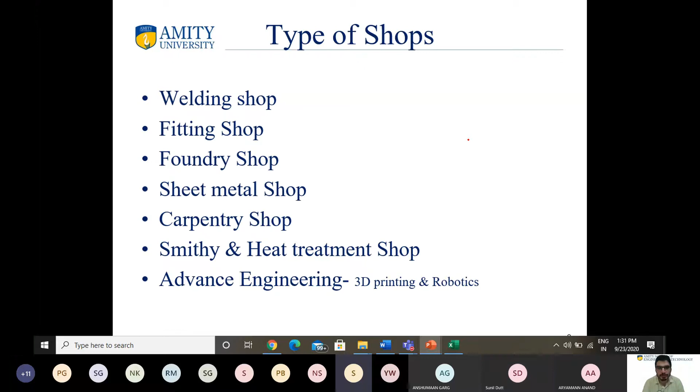Okay, today I am going to do - we have already completed our two experiments, welding shop and fitting shop. Today I am going to proceed towards the foundry shop, right? These are the list of experiments. I have already explained the first and second experiments, and this is our workshop lab. I have already explained where you have to do the work and which type of shop we are doing. Today our aim of the lab is to make a single piece and double piece pattern mold.

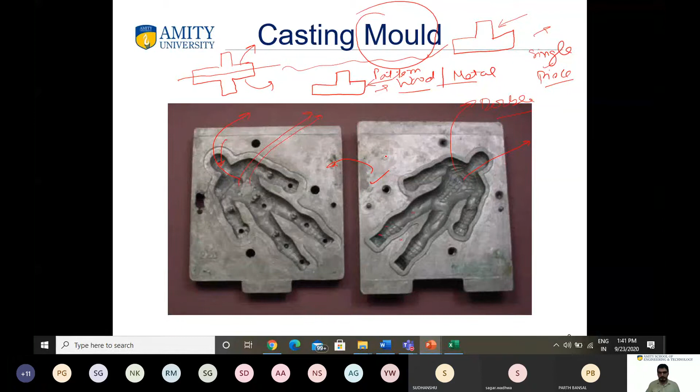It is the replica of an object. Yes, replica of the object to be cast with certain allowances.

Why is there a need of allowances, beta Lakshika? Can you tell me? Excuse me sir, may I? So you told us that is in molten form. Then? Just because of that? No beta, no, this is not that. Basically, you have not explained well.

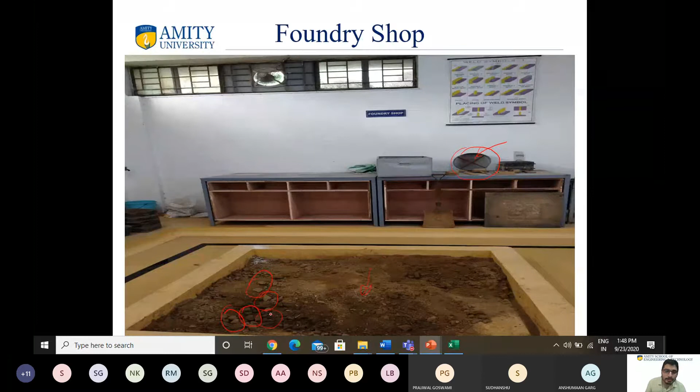When you are using the sand, these sand particles are in a closed, lumpy shape. For pressing it and making it fine, you use the mallet. Here you can see loads of closed structure of the sand. To convert it into the fine pattern, you use the mallet.

Students, are you able to understand or not? Yes, sir. Is it clear to all of you?

Now, these two rods are known as the sprue and riser. I will tell you the working of the sprue and riser when I show you the video. Then only you will be able to understand the exact meaning and use of the sprue and riser.

And these are the pins which we use to take out the pattern from the sand. These are the patterns. This is a single piece pattern. If I need to make this shape, then I can make it in a single box.

If I need this shape, then I need to make it in the double box. Double pattern means I need to divide the upper part and lower part. For making this shape, I need the double pattern, and for making this shape, I need a single piece pattern.

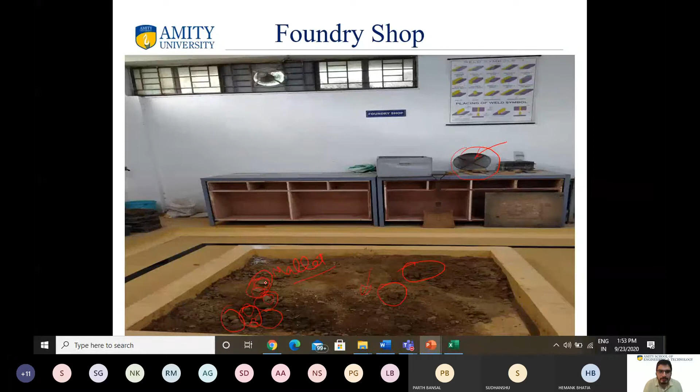Like sometime you have seen here, such types of blocks are there, right? Are you able to see, beta? So to convert this block into fine particles, you use the mallet. For packing the cope and drag with the sand, you use the rammer.

Okay, sir. Okay, beta? Excuse me, sir. Yes, beta. Sir, what are those tools at the last? Where, this one? Yes, sir. These are the pins. Okay, I will show you.

Sir, what is the use of trowels? Where are the trowels? This one. Yes, the trowel is basically used to make a shape in the mold.

If I need to make a particular corner type shape, you will not get the exact shape with the help of the pattern. Then you can use this trowel with the help of it. I will show you the working. Wait for some minutes.

Now, this one is known as the cope and drag, in which you will put your pattern and sand. These are two parts. The upper part is known as the cope, in which you can see the extra material is there. The lower portion is known as the drag. Remember these two words: cope and drag. Upper part is known as the cope, the lower portion is known as the drag.

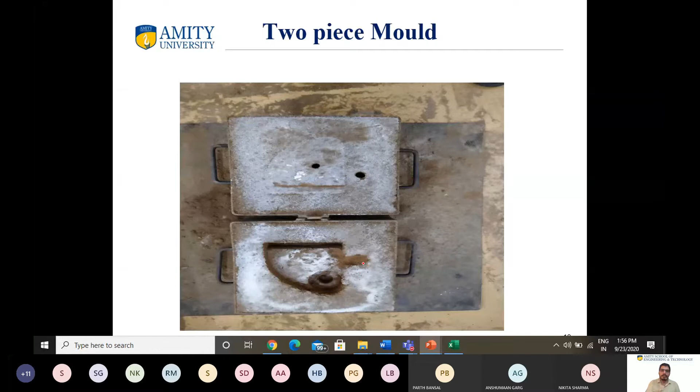These are the shapes which we can make, like I have shown you this part. This shape I am going to show you in the cope and drag. When I make it, such type of shape will come in the sand. I will show you the working, and I will show you the video in which you will be able to understand. I will come back again on the previous slides. Firstly, see the video.

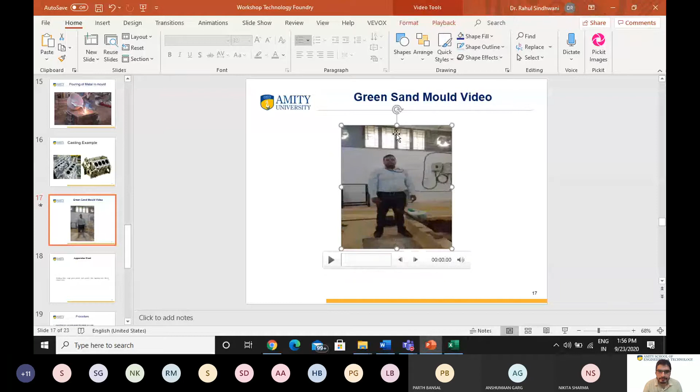Just a second. This is our lab only, our Amity University lab. These are the lab attendants. I think the video is not coming properly. Just one second.

I want to show you one more part, this one. This one is basically known as the shovel, which is not there in the tool. Are you able to see this shovel, beta? Yes, sir. This is known as the shovel. This shovel is used to mix the sand.

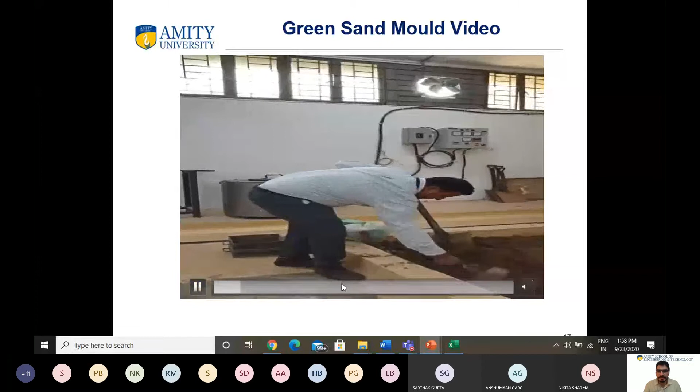Now who can tell me, what is this by which they are just pressing it? What is this? Mallet, this is known as mallet. And what is this which is in their hand? Shovel. This is the board right now, on which they will put the cope and drag.

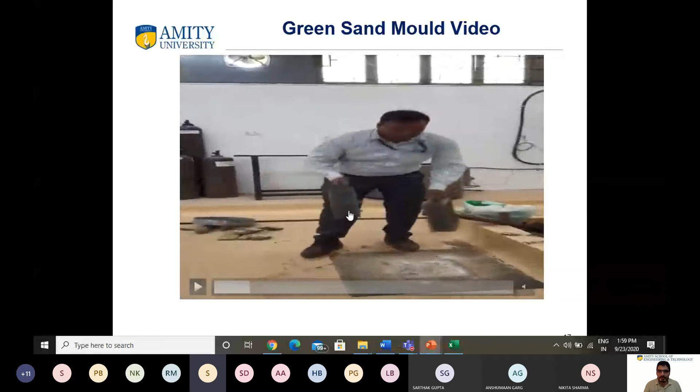Okay beta, who can tell me what is the name of this part? Cope or drag? Cope, this one. Cope, sir. And this one? Drag. Drag, sir. Good.

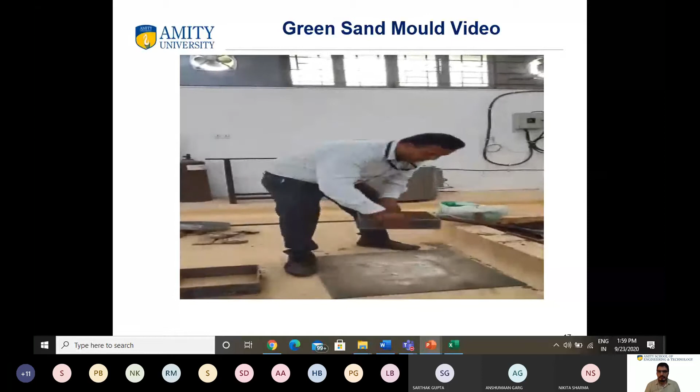Firstly, you have to put the drag on the board. They are going to make the double piece pattern. Okay, I have shown you this part, I think. Firstly, what you have to do is put this one part of the pattern on the drag.

This sand is a parting sand, not a green sand. This parting sand is used to separate your green sand from the pattern. When you will not use this parting sand, they will stick with each other. To remove the stickness from the green sand, we are using the parting sand. They are just throwing the parting sand.

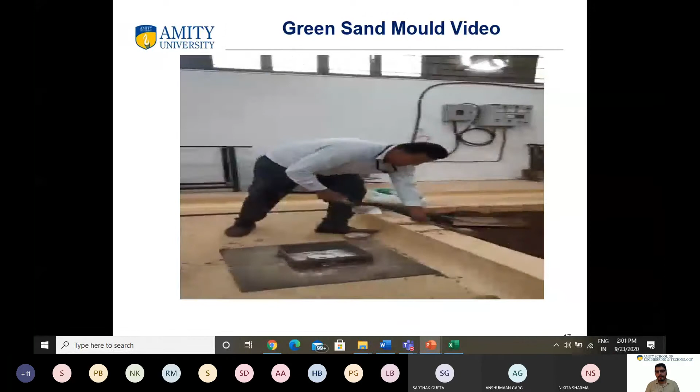Now you are able to see what is the use of these two. What are these? Rammers. Rammers. What is the use of rammer? It is used to press the sand in cope and drag, for pressing from the corner. So that's why there are two different types of rammers.

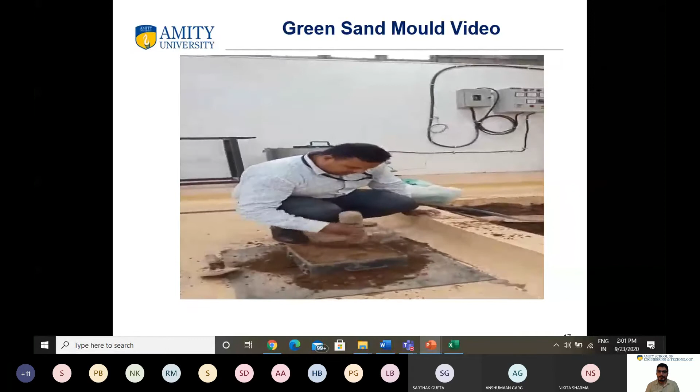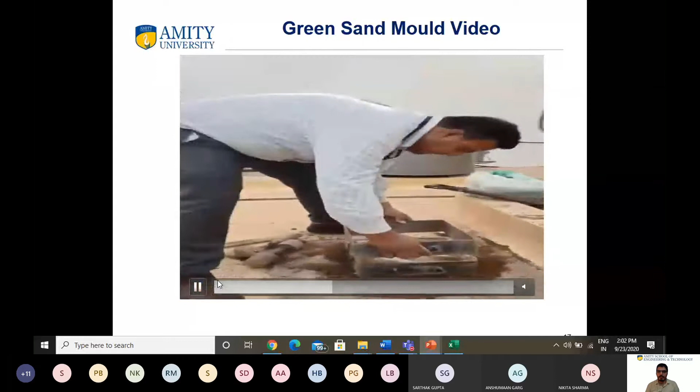Now you can see the use of your wooden rod. Now you can see here, your pattern is coming here. After that, what you will do? You will put this cope above the drag. Then after that, in the same way, you will put another part of your pattern. Then after that, you will put the parting sand so that it will not stick.

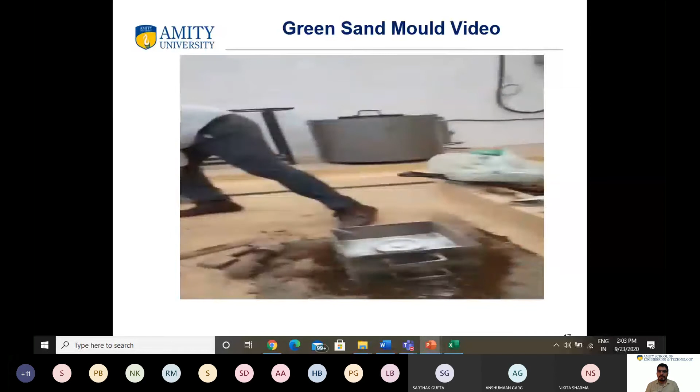Then after that, you are going to use these two rods. These are sprue and riser. What is the use of sprue and riser? Why is there a need to put this sprue and riser? Now listen carefully.

This one is known as the sprue and this one is known as the riser. The sprue is used for pouring. What will happen when you put this sprue and riser? Then two small holes will generate in the sand. What is the use of that?

Basically, with the help of this rod, this hole, this blank space, your molten material will insert from this rod. And the use of this rod is basically to check whether your material is filled in the mold or not.

And the second use of this rod is to escape out the hot gases. Because when you put the molten material in, it is in very hot condition, the hot gases will generate. These hot gases need to come out, so that's why we are putting this hole.

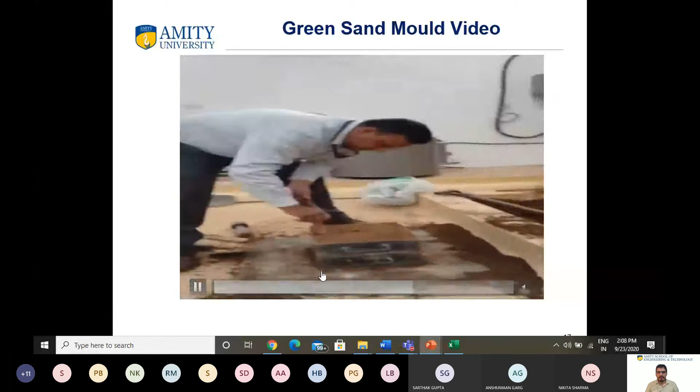Now after that, what you have to do is take out this sprue and riser from the sand. Now see, who has asked me, who is not able to understand the concept of sprue and riser? Can you give me your name beta? Sir, Nibir Maram Deka, 0348. 0348, Nibir. Yes sir. Now just see here.

You have taken out your sprue and riser. Have you seen? Yes sir. Now from here, this part is known as the sprue. Now what happened when you take it out, sprue and riser, then one hole will generate.

One hole will generate inside the sand. With the help of this hole, you will pour your molten material. This hole is known as the sprue hole, and this hole is known as the riser hole. With the help of this sprue hole, what you will do is pour your molten material. The use of this sprue hole is to put the molten material.

Nibir, is it clear, the use of sprue hole? Yes sir, I got it. Now, what is the use of this riser hole? This riser hole is to check whether your molten material is completely filled in the mold or not. And the second use of riser is to

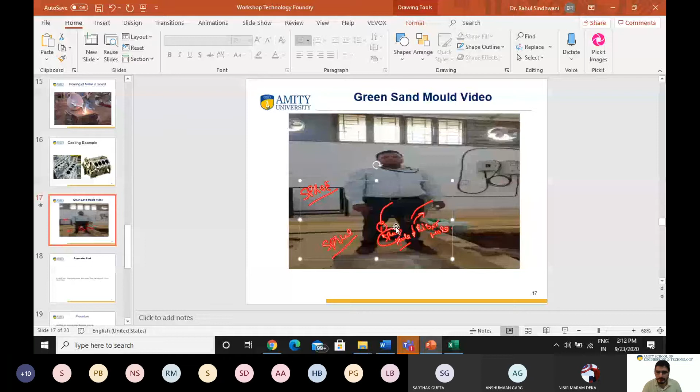Just give me a second, I will play the video again from where we left off. We have just let the gases escape from the sprue and riser. Then after that, what are they doing? Just see here - they are making the hole of the sprue hole much bigger so that your molten material will go in properly.

To insert the molten material properly, they have made a big hole. Now just see here what they are doing - they are separating out your cope and drag.

Now these are your patterns which you have inserted in the sand. Now there is a need to take out these patterns so that you are able to see the mold in which you will put the molten material. What they are doing is pressing the mold, pressing the pattern so that it will come out easily.

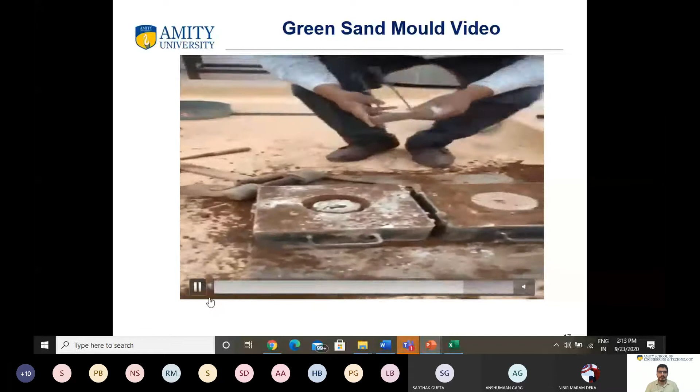Now this is the use of the pin. Are you able to see the pin? With the help of this pin, you can easily catch your pattern. Now you can see the shape - this shape is known as the mold, this blank shape is known as the mold. And this one which is in the hand, this is known as the pattern.

Now you will take out this pattern from here. Now you can see both the shapes. What is this? These are the molds.

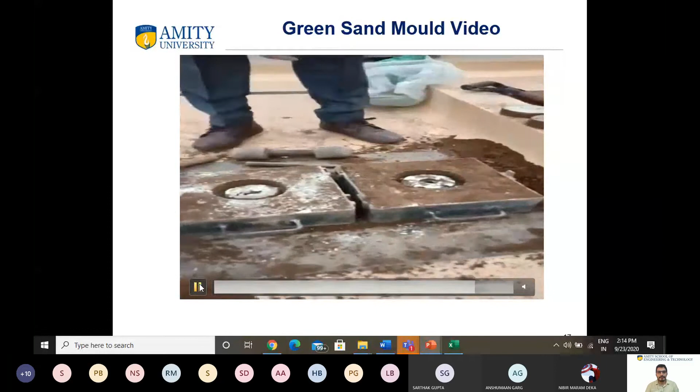Now what are they doing? They are making a path because your molten material comes from here. For the molten material, there is a need for it to go inside the mold, so they are making a path through which your molten material will go. The molten material will come here, and with the help of this path, it will enter the mold.

Now they have closed it again. Now what will happen - inside this mold, your molten material will go from here. Then they have made the path for it. From that path, your molten material will come into the mold, and the hot gases will come out from this riser hole.

Are you able to understand, students? Yes sir. Is it clear to all of you? Yes sir, yes sir.

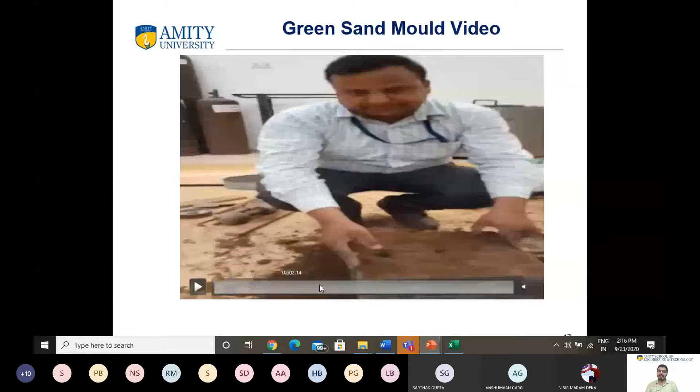That is all about your double piece pattern or single piece pattern. If a single piece pattern is there, then there is no need to put the second pattern. If a double piece is there, like this, we have used both cope and drag. Now just see again - if you have any doubt, then you can tell me.

Who can tell me what they are doing? Which sand is this? Parting sand. Yes, parting sand.

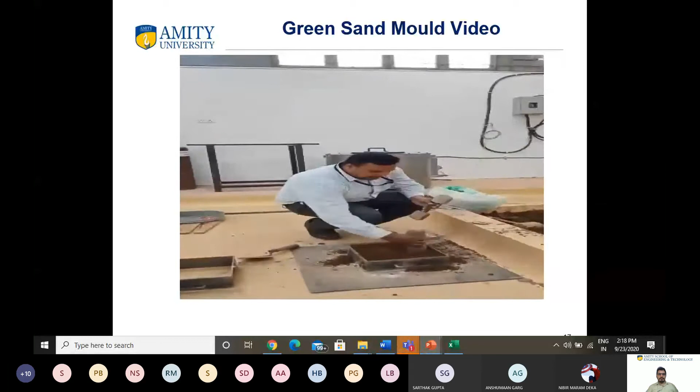Excuse me, sir. Yes, beta. Sir, give me your roll number. 349. Anshuman.

Sir, when we have created a small path so that the molten material could flow out in the end, does all of the molten material flow out, or is there any excess which flows out? From where? The path which we have made. Yes sir, in the last, when we make the path. Last, beta, with the help of that path only your molten material will come into the mold. You have put your molten material in the sprue hole.

Yes sir, then after that when your molten material comes in the sprue hole, there is a need for it to come into the mold. Yes sir, how will it come into the mold? They will make one path. Okay, with the help of that path only, your molten material will come into the mold. Okay sir.

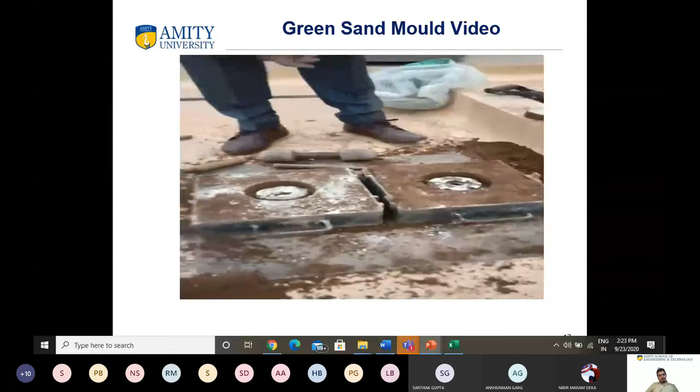Now from here beta, from the upper side you will put the molten material. From here you are making a path for your molten material basically. When from the upper side, from the sprue hole, your molten material is coming, it will come into this mold. Okay beta? Okay sir. Anshuman? Yes sir.

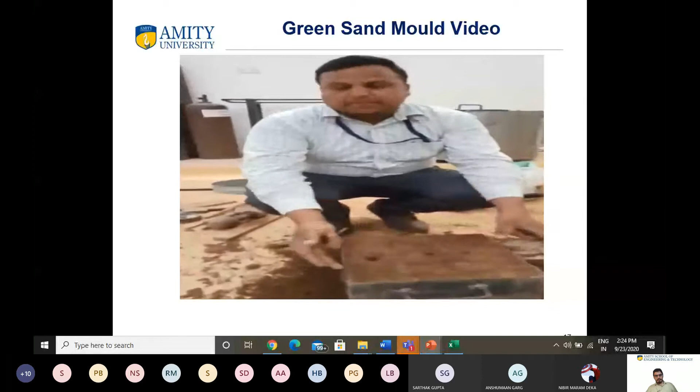Clear, beta? Any doubt to anyone? Now coming back to the tools, are you now able to understand the tools? Yes sir. Have you seen the use of every tool? Any doubt to anyone?

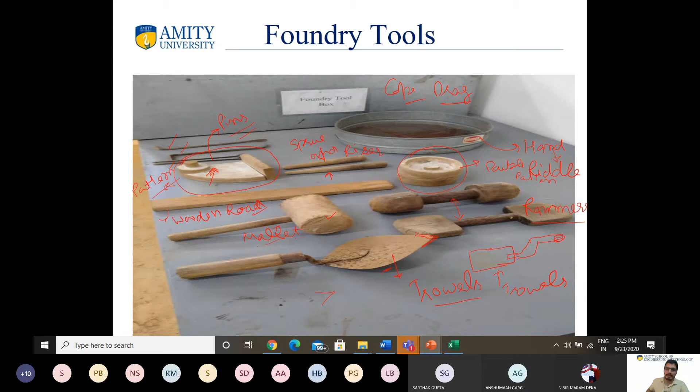Sir, where did we use that hand riddle? The riddle, actually they have already used it. They have not shown you. It is just used to sieve out the extra material or foreign material. They have already done it. Okay sir.

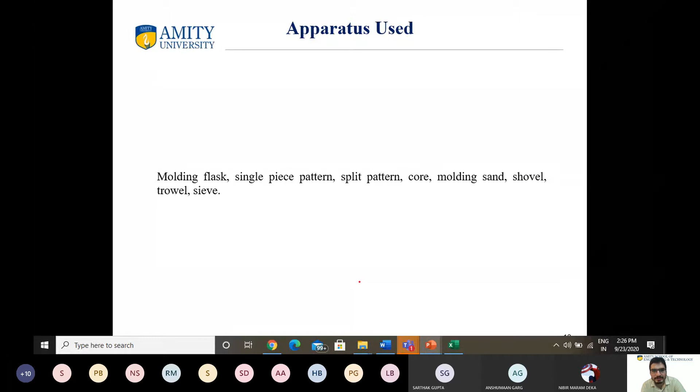Check to see if the metal molds are clean and free of any greasy substance. Mold handles should be used on the metal molds. They are threaded onto the screw located on the back side of each mold.

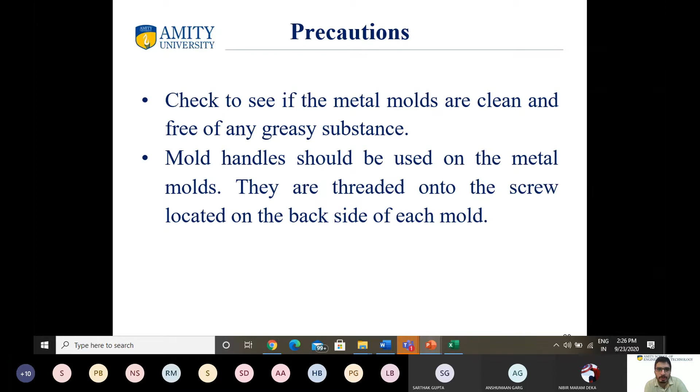What is the casting process? I have already explained to you. The gating system is the system through which your molten material will come from - tell me, from where will the molten material come? Sprue hole, and after that it will go to the mold. So the system between the sprue hole and the mold is known as the gating system. The path you give to the molten material to come into the mold is known as the gating system.

Different types of patterns: single piece pattern, double piece pattern, and sometimes you use the multi-piece pattern. If the shape is very difficult and you are not able to make it with the double piece pattern, you can use the multi-piece pattern. But in our experiment, it is only single piece and double piece pattern.

What are the benefits of sand casting? The benefit of sand casting is that the cost is very low and it is easy to make. Easy to make and low cost - these are the benefits of sand casting. Any doubt, beta?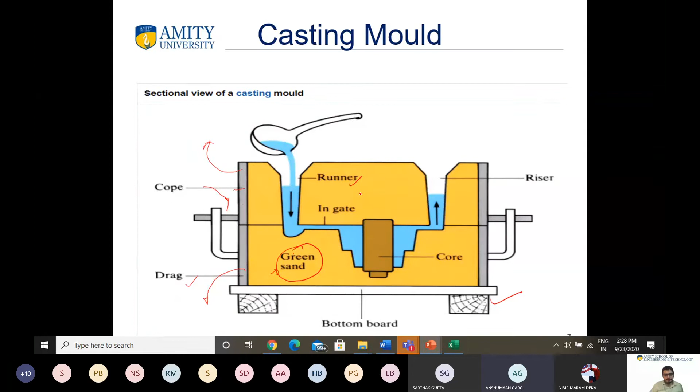One thing more - now I think you are able to understand this slide. Yes sir. That is all about today's experiment. Now I am going.

Yes beta. Sir, is there not any video of that pouring of molten material into the mold? No no, beta, that is not in our syllabus. Our experiment's aim is just to see - what is our experiment's aim? Okay, to just make it - to make green sand mold, we have to make a mold using single and double piece pattern.

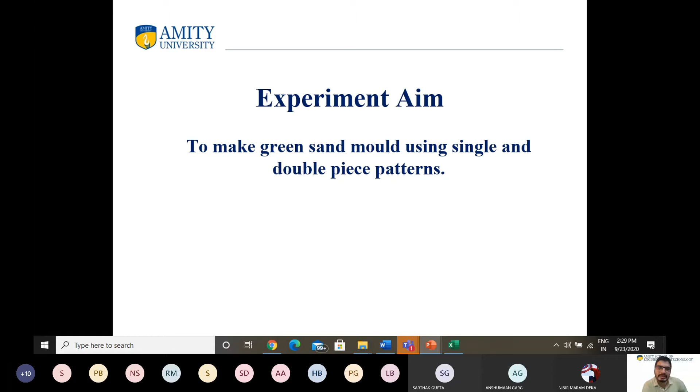Okay beta? Okay sir. That is the next part - with the help of that mold, you make the shape. Our today's experiment aim is to make green sand mold using single and double piece pattern. Any doubt to anyone? Students, any doubt?

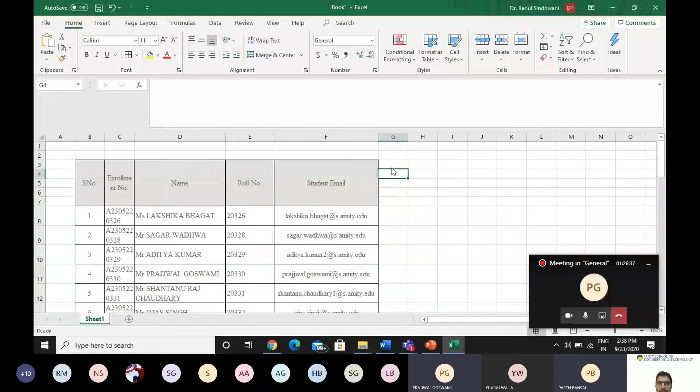Okay sir, I deleted it and I have put it in the welding section only now. That is good, that's good. Okay, now I am going to check your file.

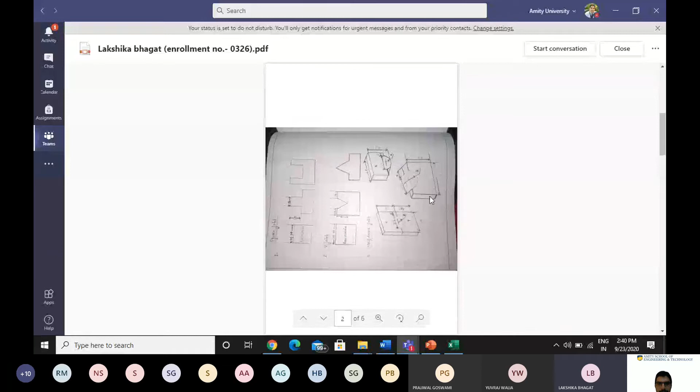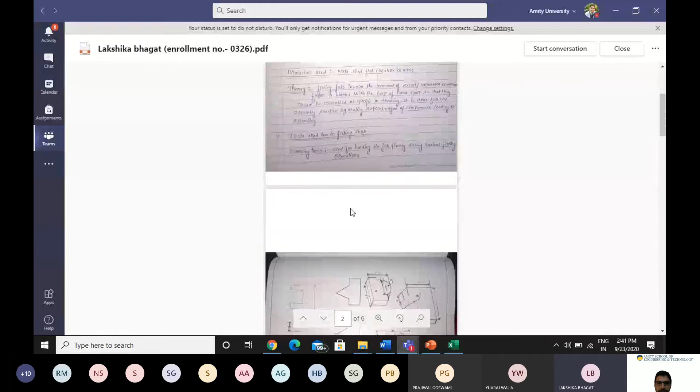Okay, can you tell me the complete process to make a V joint? Sir, for making a V joint, first of all the raw material is provided to us. Then we need to use the benchvise for making that V shape by putting it in the benchvise. And then we need to make one cut, then again we need to take it out.

Firstly, open your camera, Lakshika. Open your camera. Yes sir. Can you tell me any 5 tools which you can use during the fitting shop? Okay sir, chisels, divider, benchvise, marker, and dot punch. Okay, good.

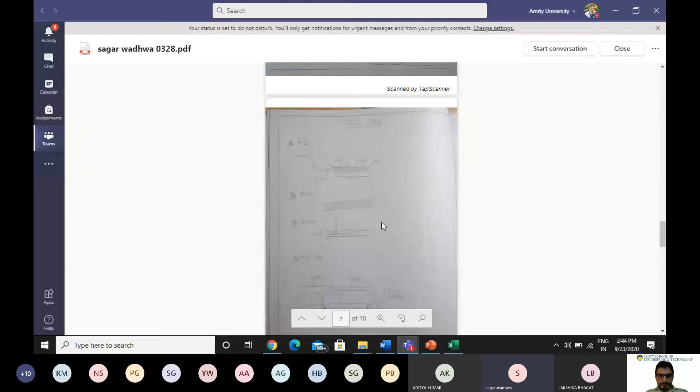What is the use of a hacksaw in this experiment? Sir, a hacksaw is used to cut the workpiece that is of metal, so that we can acquire the desired shape. Yes, good.

Can you tell me the process to make a V-joint? In a V-joint, first we take our workpiece and set it on the benchvise at such an angle that we can cut a V shape from it. But we also have to use a file because we cannot properly cut a V shape, so we use a file to remove the extra piece of metal from it. Good, beta. Thank you, sir.

Now Aditya, your file is not here. You have sent me on WhatsApp. I will check it later.

Prajwal Goswami. Yes sir, I've uploaded both of mine, the last one for reconsideration and this one for submission. Where is it, beta? Sir, if you go here. Yes, getting it. Firstly I am checking your fitting shop file, beta. Okay sir.

Sir, I couldn't put diagrams in that way because, I don't know, I think cam scan will glitch there.

What is the use of hammer in this experiment in the fitting shop, beta? Sir, hammer in this experiment, if there is some uneven surface, we can use it to even it out. Let me frame the sentence, sir.

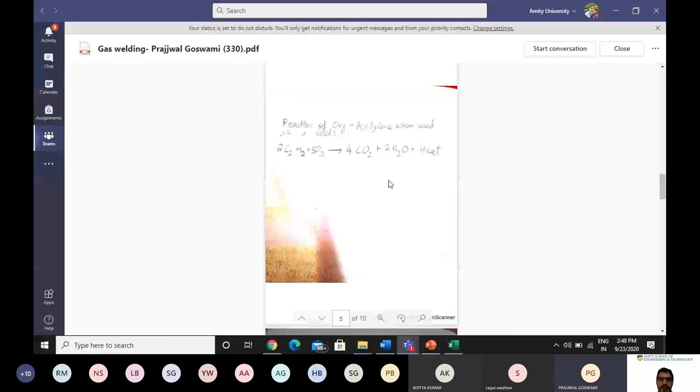Where is the water here? When you will just react these two gases, then the water is coming. Water you will collect in any? Where will the water go? Sir, I think due to the heat, the water should just evaporate.

Yes, sir, here are the diagrams you said to make. You have to write the caption also, whatever it is. What are these? These are cylinder, okay sir. You have to write what you are doing here, you have to write here figure one. I think, sir, the diagram I have written is for this one, gas welding, on the top.

Where is it? I'm not able to catch it. I think it didn't come in the photo, some part of the top is cut. Sir, this is the arc welding one, in this I wrote below. You have no eraser? Why have you not erased the extra part? Sir, sorry, I didn't notice that.

Yes, that is okay. I am increasing your marks from B plus to A, right? Thank you, sir.

The next student is Shantanu Raj Chaudhary. Are you there, Shantanu? Sir, I've shared it on your WhatsApp. Why on WhatsApp? Sir, I'm not able to upload it on MS Teams. Okay, no problem, I will check your file later on.

Ojas Singh, 332. Ojas Singh, are you there? Ojas absent. Yes, oh sorry.

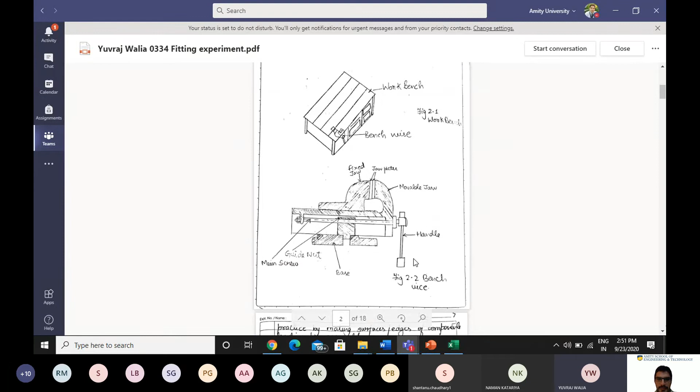Yes, this is your beta fitting shop experiment. Sir, I can't see your screen. Ah yeah, I can see it now. Very nice diagram, beta, very good. Thank you sir.

What is the use of vernier caliper, beta? Can you tell me? Sir, with this instrument we can measure things accurately. Okay, what is the use of bench vise? Sir, to hold our workpiece firmly so that we can work on it.

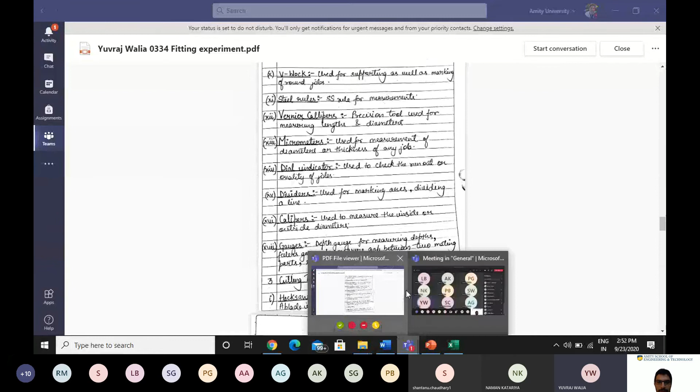Can you tell me any 5 tools? Please open your camera. Sorry sir. Student, please open your camera when you are giving the answer. Sir, can you see me? Yes beta, yes Yuvraj, good.

Sir, 5 instruments: first of all, tools include hacksaw, which is really important to cut stuff. Then we have center punch to initiate a hole so that drilling can be made easier. Then we have files so that we can smooth the edges. And sir, we have vernier calipers. We have steel rule to measure things. So these 5 things. Good, yeah.

Can you tell me the process to make a V joint? Sure sir. First of all, we'll get a workpiece and place it on the bench vise so that it's easy for us to cut it with a hacksaw. When we cut the V joint, we have to file around the lower point to make it smooth, to make it a perfect V joint. Okay, good. Thank you sir.

I am marking your marks beta of the first and second experiment. So if any student has any doubt, please tell me. Sir, I have that welding practical file also uploaded. You wanted to see the diagram, so I have made the diagrams and uploaded it.

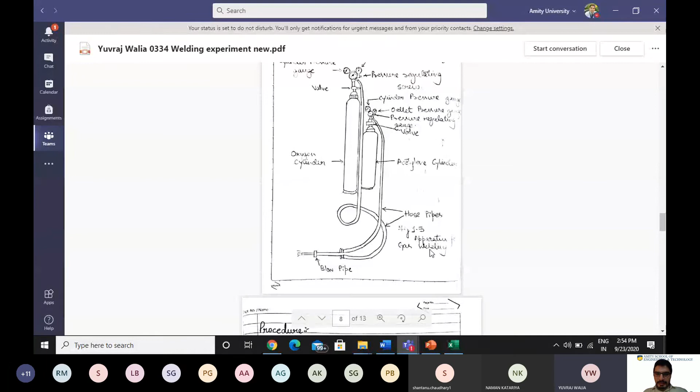You also need to write here beta, cylinder. Sir, for gas welding. I can't see it, where sir? Yes, you have made it, apparatus of gas welding, you have written it. No problem, actually this was not great, but now it's perfect. Raj, I have converted your marks from A to A plus. Thank you sir, okay.

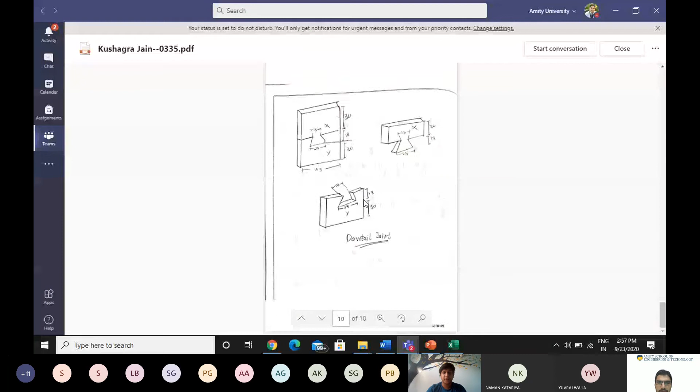Beta, you have not made the diagram for the tools. Yes sir, I did not know that we have to make that. So next time, can I show it?

Beta, this is the last term, please complete your file. I am giving you B plus right now, but if you want to improve your marks from B plus to A plus or A, you have to complete it.

Okay sir, so if I show you the diagram next time, will you improve my marks? Yes, because in the next term I will check the three experiments. Is that the last term to check the three experiments? After next term, I will not check any previous experiments.

Okay, so next term is the last term to check the previous experiments. Like today I have completed checking your foundry shop experiment. Next time I will not do any new experiment, I will only check your files. Okay sir.

Nikita Sharma. Yes sir. Excuse me sir, can you please check my file, Naman Kataria?

Naman Kataria, beta, I think you have sent the file on WhatsApp, right? No sir, it's uploaded on Teams. I've just uploaded it now. Okay sir, I'm going to check it with you.

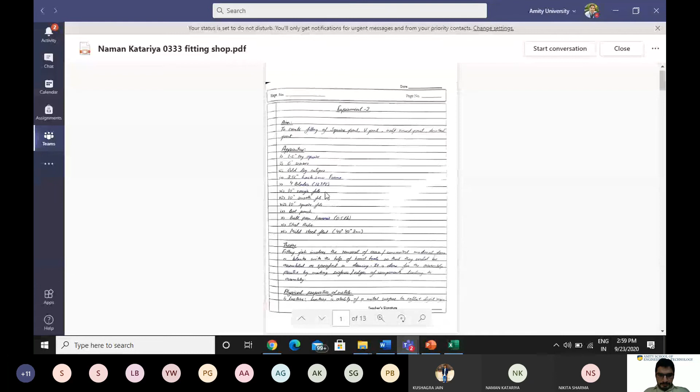Naman, fitting shop. Can you tell me any 5 tools in the fitting shop, beta? Yes sir, tell me.

Sir, the scriber, hammer, taps, dies... Naman wait, why are you not opening your camera? Sorry sir, I asked you to open your camera when you give the answer. Please open your camera. Okay beta, sorry sir.

Naman, I'm not able to see you, beta. Sir, I've opened my camera. But I'm still not able to see you. Okay, not to worry, your video is coming now.

Naman, can you tell me what is the process to do the fitting for a V joint? If I want to make a V joint, then how can I make it? Complete the process for V joint - first we have to make the marks and check that.

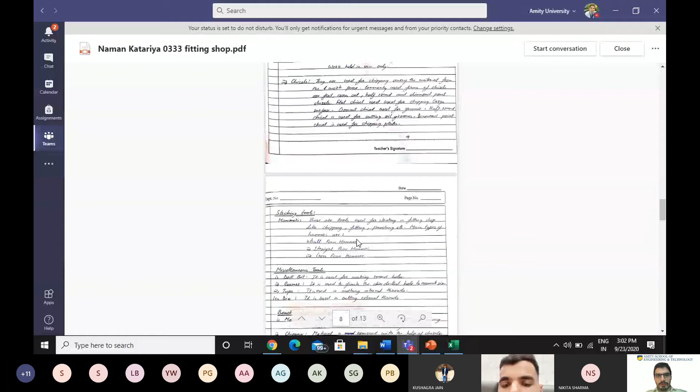And here also beta, you have not made the diagram for the tools. I told you in the starting of the meeting about the compulsion of making diagrams. Okay, I'm giving you A, but you have to make the diagram also. Next term I will check your file again.

Okay, now for the welding shop also you have uploaded? Yes sir. So I think it's in the journal, so it's not uploaded in the folder, I think.

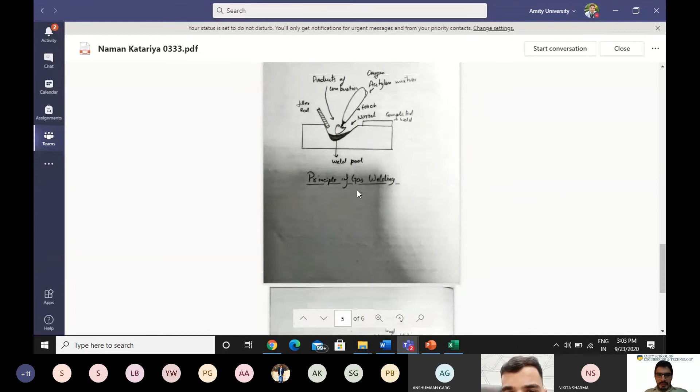Beta, can you tell me? You have not made any diagram for the arc welding also, beta. Sorry sir, here it's arc welding. Gas welding is also there, but you have not made the picture of the cylinders, etc.

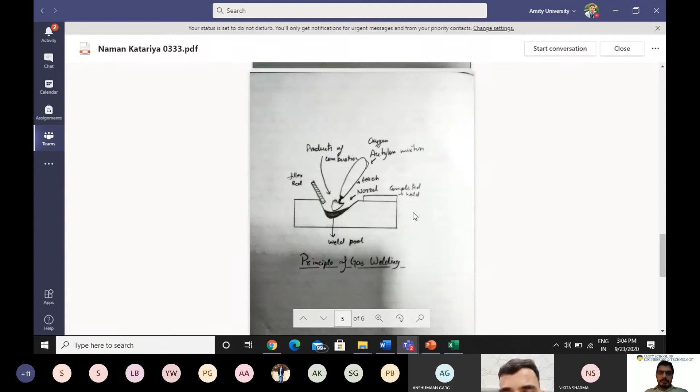Can you tell me the difference between arc welding and gas welding? In gas welding, the welding is done by the heat produced by the reaction of gases. In arc welding, the heat is produced by the spark between two terminals. What maximum temperature can you attain in gas welding, particularly for the oxidizing flame? For gas welding, it is 3000 Kelvin maximum. Sure, 3000 or 2600.

Okay, Naman. Okay sir. Just one second. Now,

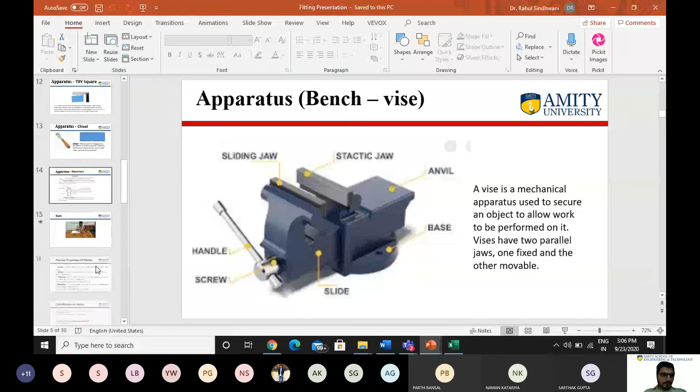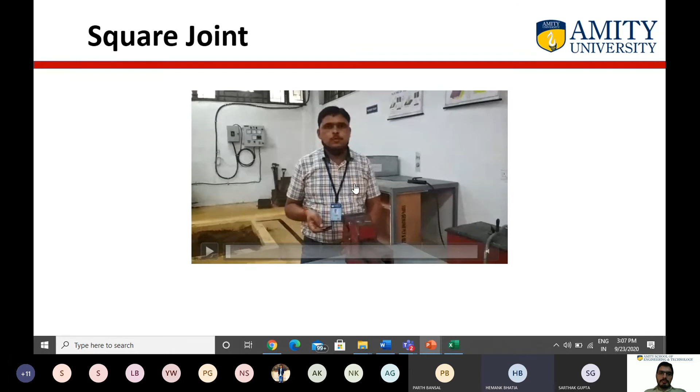Now I want to take the query. Sir, in the fitting shop experiment, do we have to write those bench working processes - marking, chipping, filing? Yes, you can write them, but that is not compulsory.

Anshuman, please see here. This is a workpiece on which I want to cut the V shape. First I need to fix this workpiece at an angle to cut the V shape. Is it a 90-degree angle with respect to the bench vise?

Not 90 degrees. Can you see here, the workpiece is here - in a triangle-like shape. Now what you will do is cut this, I want to make this workpiece like this. Then what I will do, I will try to cut in this direction, then after that I will try to cut in this other direction. Now this part will come out.

Maybe what happens is the complete piece will not come out - maybe from here to here only you are able to cut, maybe you are not able to cut more. I want to cut the shape like this. Yes, you want to cut the shape like this, and you are able to cut only this part.